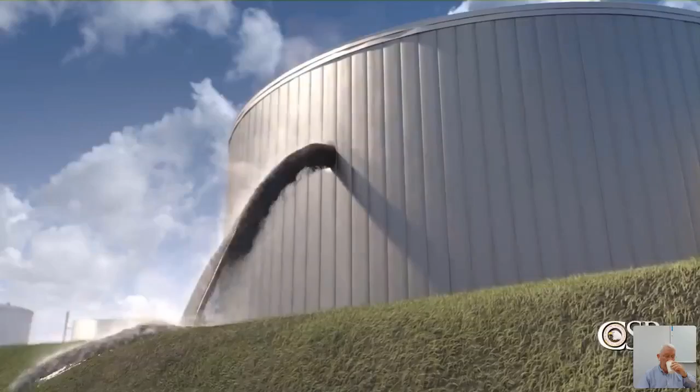At approximately 10 a.m., the hazardous mixture of air and hydrocarbons found an ignition source, and there was a large explosion. Debris from the explosion flew about 200 feet and hit a large above-ground storage tank, puncturing the side of the tank and releasing hot asphalt. Asphalt poured out of the tank over the containment berm and into the refinery's operating units, where it spread along the ground. At around 12:15 p.m., the released asphalt ignited near the storage tanks, and a fire broke out.

The fire traveled along a stream of asphalt to the refinery's crude and FCC units. The fire produced a huge plume of black smoke, leading to the evacuation of a portion of the town of Superior. Now that's not something you want to have to explain. So, how would you prevent something like that happening? Well, one of the things you must do is make sure your barriers are in good condition.

What I mean by that is, if we use the barrier Swiss cheese model, we see hazardous activities are guarded against using multiple barriers. So long as failures are spread throughout the barriers, then the system as a whole will avoid an accident. It's only when the holes line up, like the holes in a Swiss cheese, that disaster strikes. Think Deepwater Horizon or Texas City. The thing about the barriers is that they deteriorate over time, and that's why you do your inspections.

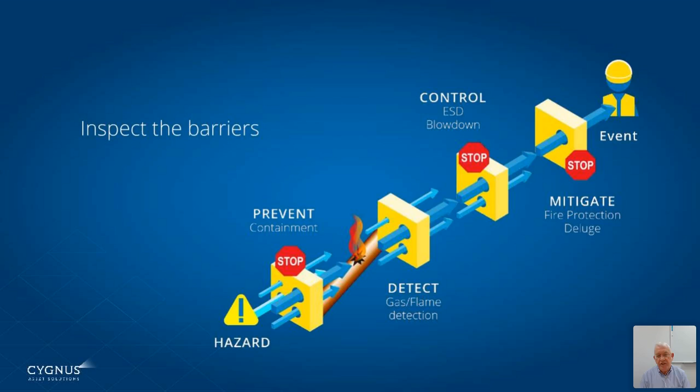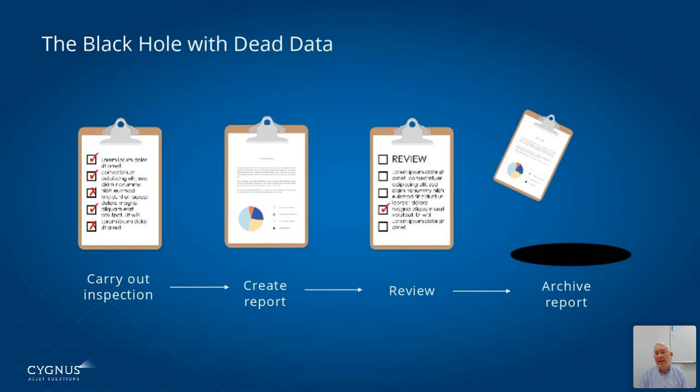Now, you're going to collect lots of inspections to comply with regulations. So the thing about it is, how do you collect your data and how do you store it? Collecting data manually generates errors in the region of 20 to 30%. Storing it in a PDF means you can't trend or analyze it. It's dead data. What you really need to do is transform your data into wisdom and insight via information and knowledge. Now, another way of looking at that, of course, is that knowledge is knowing the tomato is a fruit. Wisdom is not putting it in a fruit salad.

The wisdom and insight that Axis generates is your knowledge of the condition and risk of your assets. So what Axis does really well is it automates and digitizes the working process to generate significant gains in efficiency. So now I want to just talk about software.

So the question then is, what do you think is the single biggest issue in getting easy adoption of software? It's the navigation. What we've designed in Axis is something that's responsive, versatile, and customizable. What makes it really versatile is the navigation. What people want is something that is more intuitive, guides the user, and increases accuracy.

We're going to have people who will use Axis not very often, and they expect something that's easy to understand every time they have to use it. We'll have people who will use it all the time, and they want something that's going to be highly reliable. We have done a great job in ensuring that the interface is all about the users. Now, what I want to do is show you a short demo on Axis's user interface and navigation.

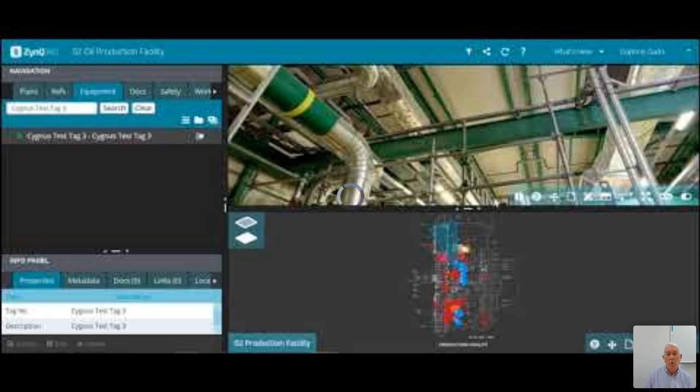Let's explore Axis's user interface and navigation. When you first log in, you'll be presented with the home page with a map of your facilities. Assets are at the heart of Axis and where we manage the inspection. A demo of how work packs, results are entered and reviewed, and how assessments are executed will be shown later on. The maintenance hierarchy is a mirrored version of the hierarchy located in the CMMS. It is updated automatically at a set interval and cannot be altered by the user.

Depending on the asset type, asset hierarchies contain a list of assets and act as an equipment register. The asset information page contains the details of the asset specific to the equipment type, such as the operating design, material properties, safe operating limits, and other details. Within the History tab, you can view the inspection history and trend the results. Additionally, you can review the integrity operating windows.

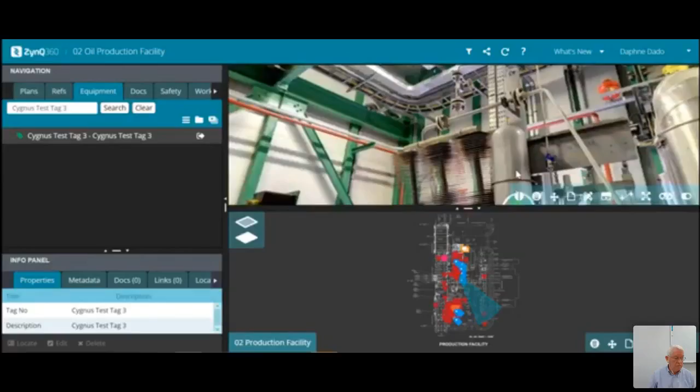You are also able to view the asset within the 360-degree view of the facility. This is an interactive, powerful tool that is useful for users where you're able to view external assets. Looking into the maintenance plans, these are assigned to the asset within the CMMS system and can be viewed by clicking on the See Details button.

These are updated automatically and cannot be edited or deleted by the user. Axis also shows all the work orders associated with the maintenance plans, automatically updated according to your CMMS.

The work order properties and indicators can be viewed via the See Detail button. These indicators can be edited for a specific task, however this does not change the maintenance plan indicators and becomes a one-off event. The work order properties, work packs, entering, reviewing, and viewing results will later be explored in the Axis workflow.

The inspection results can be viewed in two ways, either through inspection history and opening the indicator history, or through the work order using the View Result button.

Next is the Work Management tab, where it acts as a shortcut for users to view your facility's work orders, notifications, and schedules. The Work Order tab acts as a shortcut for users to see which scopes are approved or which inspection results are ready for review.

In the Notifications tab, you can easily view notifications that are open and where corrective action is needed. Lastly, your Scheduling tab is a direct integration from your CMMS, where you can view important data, such as inspections which have yet to be completed, scheduled work packs, and other assessments required.

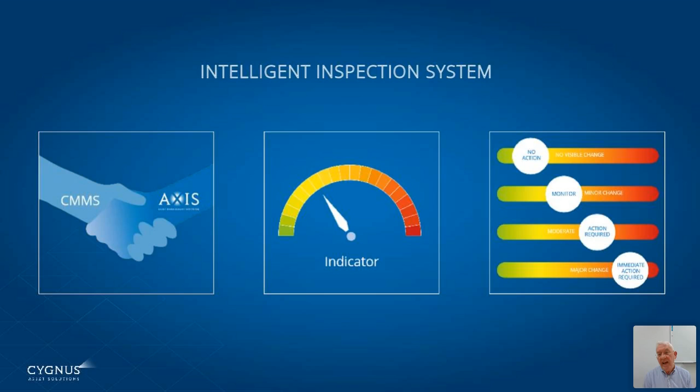And the third is the state, or the actual condition found - so it's either good, not so good, bad, or very bad. How many times have you reviewed a 20-page inspection report and still scratched your head to figure out what is the state, what is the condition? You don't have to do that anymore.

So let's now look at the workflow in Axis and see how easy it is to create work packs, enter and review results, and create reports.

Welcome to Axis Asset Integrity Management Platform workflow. We're going to show you how Axis can simplify your entire inspection process, from generating customized work packs to entering results within the software. Let's get started.

Clicking on your desired asset takes you to the work order properties, work order indicators, and work order attachments. Before approving the scope of work, you would need to customize your work order indicators, which includes NDT indicators if necessary. You can choose to either select or remove indicators through using the Select Indicators and Remove Indicators buttons accordingly.

All that's left now is for you to approve the work scope. This can be done by clicking on the Approve Scope button, and the status will be changed to Scope Approved. The results can now be entered, and your inspectors go on site using a tablet and key in data according to the work scope.

The Enter Results window displays the indicator being inspected through choosing one of the 4 selections available, best describing the current condition. NDT specifications and measurement data can also be entered into the software.

So if we look at CUI, CUI is one of the process industry's most pressing problems in terms of forced shutdowns, loss of production, safety, and environmental issues. The highest incidence of reported leaks in the refining and chemical industries are due to CUI and not due to internal corrosion. This is according to the US Chemical Safety Board.

Why is this a problem? CUI is challenging to detect, and reliable inspections are expensive. So what is the solution? Well, part of the solution is to use the API 583 risk-based approach to identify equipment subject to CUI, prioritize inspections, and generate inspection plans to mitigate the risk. And this is what we've done in Axis. So this methodology is now in Axis.

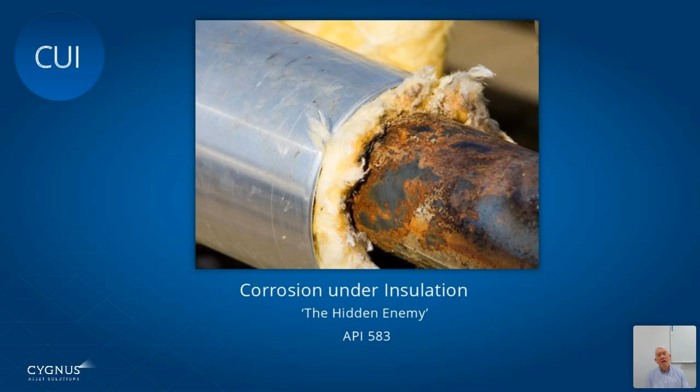The second risk-based approach is non-intrusive inspection. There are significant benefits in terms of safety, cost, and availability in not having to go inside a pressure vessel to do inspections. The difficulty, of course, is finding a methodology that's robust and generally accepted by industry. The HOIS recommended practice 103 is now the generally accepted methodology. The thing about it is pretty complex, especially the integrity review part and the decision-making process part. But we have solved that problem, and that is now developed in Axis.

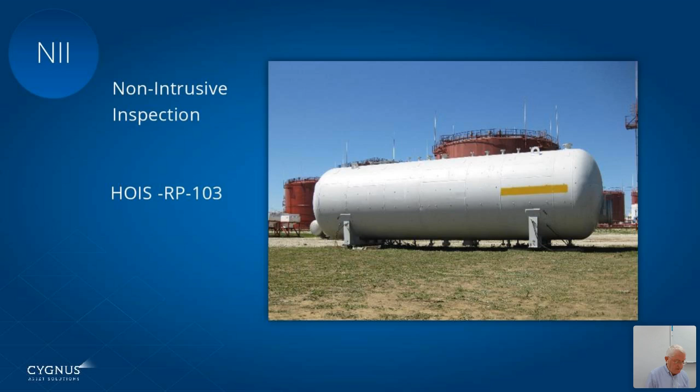The third risk approach is for RBI. I'm talking here about RBI for pressure vessels, piping, tanks, and PRVs. Our approach is a semi-quantitative approach. We do, of course, have a fully quantitative approach for age-related damage mechanisms, and we differentiate between RBI for internal and external. This is a pretty practical approach, and it is in fact similar to what we believe is now used by most of the majors out there.

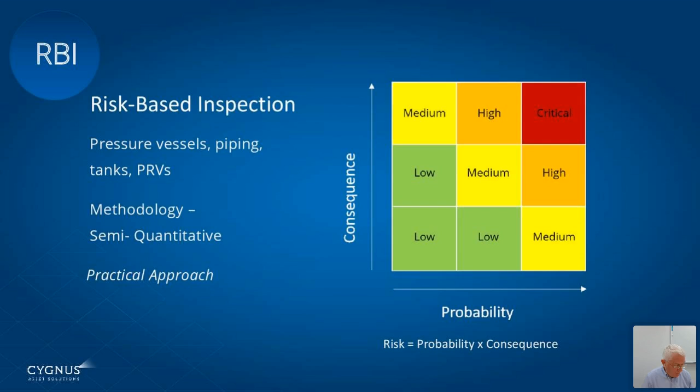So what I want to do now is look at a demo of how an RBI is done on a pressure vessel in Axis.

RBI in Axis. Let's find out how we can execute risk-based inspection in Axis. This is a rather straightforward process. Simply go to your desired pressure vessel in your maintenance hierarchy, asset properties, or enter the tag number in the search bar. You can copy damage mechanisms for cases such as equipment operating in parallel or assets with similar designs.

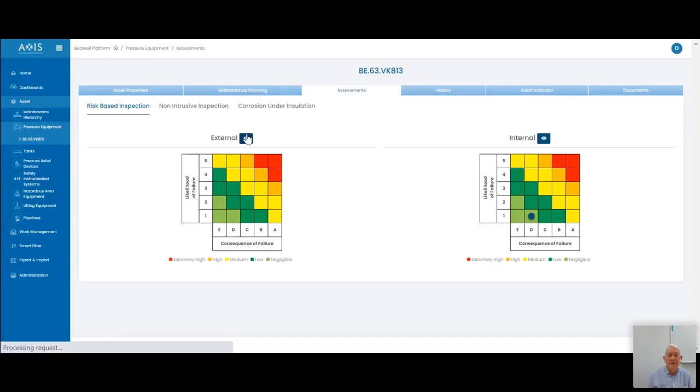For low criticality equipment, it may not be necessary for this assessment to be done, and will be shown as assessment not required. The risk-based inspection is divided into the external and internal assessment. Using this pressure vessel, let's start with the external assessment. You can see historical assessment results in the high-level summary page. This will be updated after our inspection is done.

You can add a pre-programmed damage mechanism which is specific to the external condition of the asset. This is a short list of the common damage mechanisms. Choosing atmospheric corrosion, the likelihood of failure is chosen, taking into account the coating condition, coating age, temperature, and so forth. The consequence of failure is then selected. A table is used to visualize this risk ranking of the damage mechanism.

Axis will then automatically determine the inspection interval and the next inspection date. After completing the external assessment, mark the assessment complete to prevent accidental change.

Now for the internal assessment for the same pressure vessel. Similar to the external damage mechanisms, a short list of both age-related and non-age-related internal damage mechanisms are presented. Nominating general corrosion, which is an age-related damage mechanism, we would be presented with two extra tabs, which are rates and confidence, and indicators. Within Axis, you can either use the design corrosion rate or choose to populate the data yourself.

The current wall thickness, date, and design corrosion rates are added with the confidence factors also filled in accordingly. If an indicator is already linked, the indicator will then populate the wall thickness measurement. If not, this can be populated by the user.